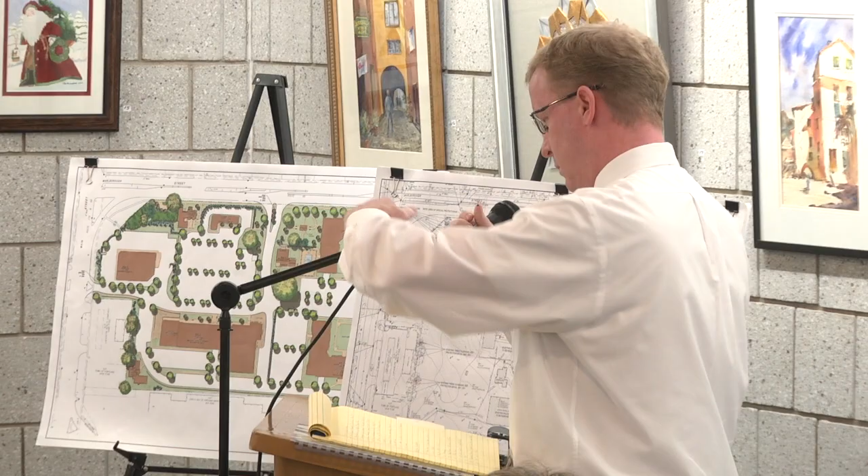The site is located with frontage on Marlborough Street, Main Street, and Perry Avenue. Perry Avenue is on the east side of the site development. It's currently home to the vacant Elmcrest Hospital and 3 historic structures: the Sage House, the Hart Jarvis, and the Brainerd House, with Sage located closer to Main Street. Hart Jarvis is centered in the portion of the property, and Brainerd is to the east of Hart Jarvis. In addition, the proposed development contains 14 single-family home properties located along Perry Avenue.

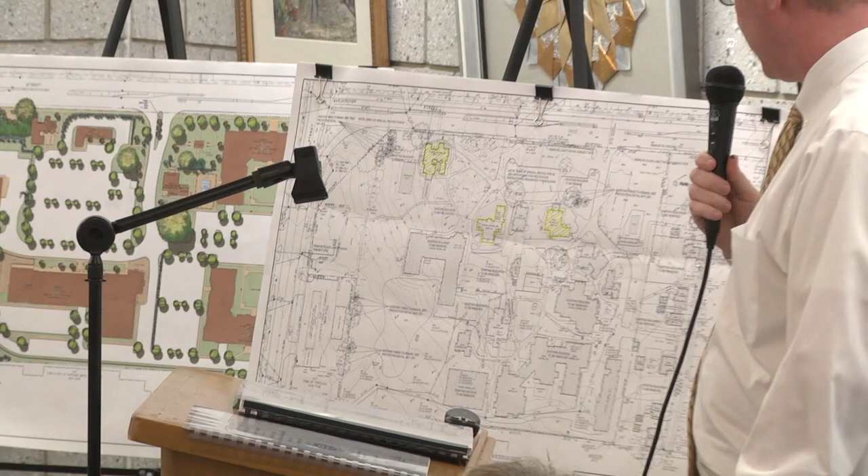The site consists of about 14.9 acres. It's located in the B2 and B3 business zones, as well as the Town Center Village District. The topography of the site is relatively flat to moderately sloping, sloping to the southeast and southwest from Main Street. There are no wetlands on the property. Site soils consist of hydrologic soil type B, which is a good, well-draining soil.

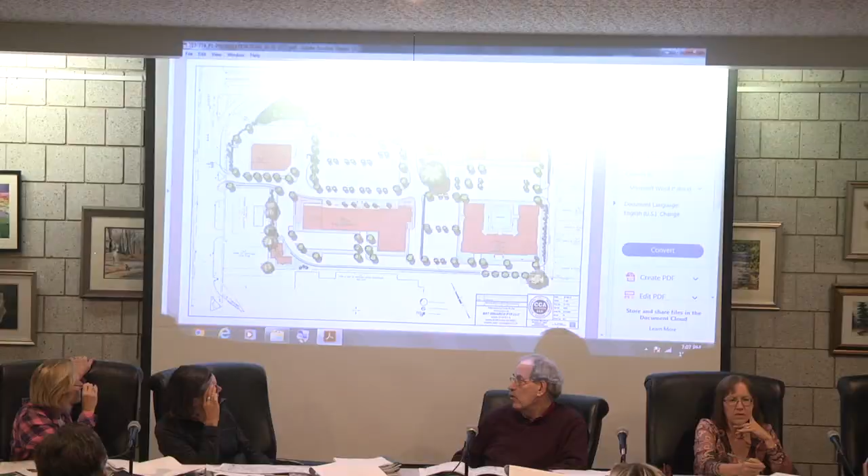This is Brainerd Place, a mixed-use development. There will be 5 new buildings proposed and 3 existing historic structures to be restored.

Building A, located on the south side of the property, is a proposed office retail building. Building B, located closest to Main Street, is a proposed pharmacy with a drive-through. Building C is the Sage House, proposed as a restaurant. Building D, to the east of Sage House, is a coffee shop. Building E, located at the corner of Perry and Marlborough, is a residential apartment building.

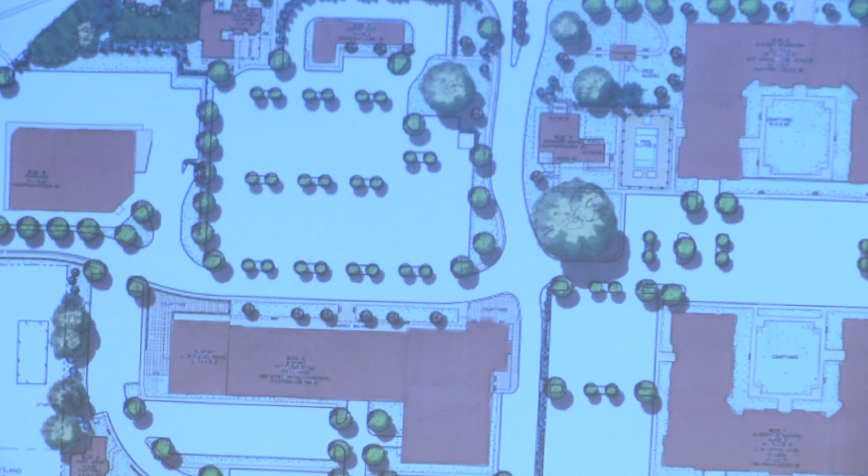Building E contains 101 apartments. Building F, located to the south of E, is the second residential apartment building, containing 139 apartments. Building G, located to the west of Building E, is the Brainerd House, which will be restored and serve as an amenity building for the residential apartment buildings. Between Brainerd House and Building E is a proposed pool for the use of those two residential apartment buildings. The last building, Building H, is the Hart Jarvis, which will be relocated to the southwest corner, right adjacent to the Town of Portland property, which has frontage on Main Street.

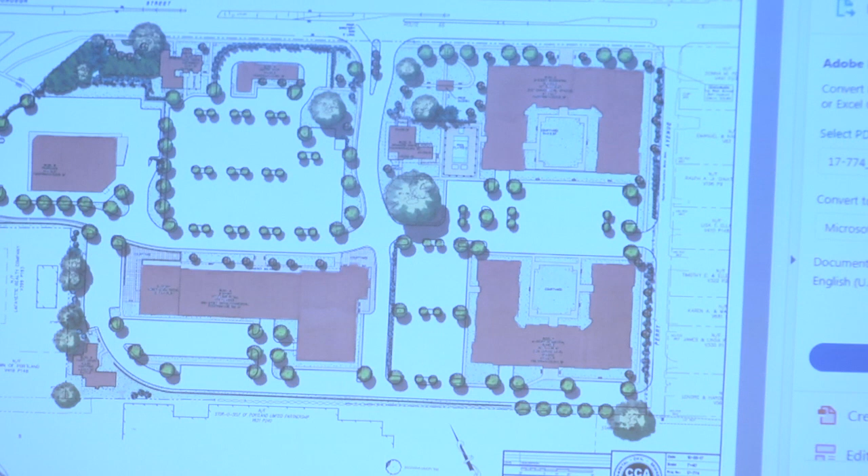Main access to the site would be from Marlborough, centered in the middle of the development, proposing a new traffic signal and road improvements along this section of Marlborough. We're proposing a right turn in and right turn out only onto Main Street. We also have 2 gated driveways on Perry Avenue, which are only for emergency access. There will be no regular use of those 2 driveways for users of the site or residents.

There are 804 proposed parking spaces, with 252 of them located on the bottom level in parking garages below Buildings E and F. 24.5% of the property is building coverage, 74.7% is impervious coverage — 80% is the max according to the regulations — and 25.3% would be green space.

As part of the MUD mixed-use development regulation, Section 9.17.5A allows for the request of waivers to certain regulations. They are located on our layout plan, but I'll go through them real quick.

The first is Section 7.33, access from Main Street to a drive-through service. That's the proposed drive-through pharmacy, where we have the pickup window in the rear of the building. We feel the proposed right-in right-out allows for good site circulation from a traffic standpoint, also access

for emergency vehicles and delivery trucks. The next section we're requesting a waiver to, or a slight reduction to, is 8.2, the parking calculation. We're requesting a 4% reduction below the required parking, related to the apartment buildings. We're basing the parking calcs on national standards for these types of buildings and unit mixes. The applicant has built this building in Brookfield, and we used the same unit count and parking calc, and it works out well for those unit mixes.

Does your plan show that 4% reduction in parking? Yes, it's listed in the table on the layout, in the design. In other words, what was it, 810 parking places you said? 804. Is that with the reduction or without? That's with the reduction. Thank you.

Next section is 8.2.6C, which is landscape strips between tiers of parking. The areas that would consider this are east of Building F and between Building A and B. We do have landscape islands. We felt a landscape strip would cause issues with the layout of traffic coming in and out, trying to align the drive-through and the other driveways into those parking areas. That same request was granted on the previously approved application several years ago.

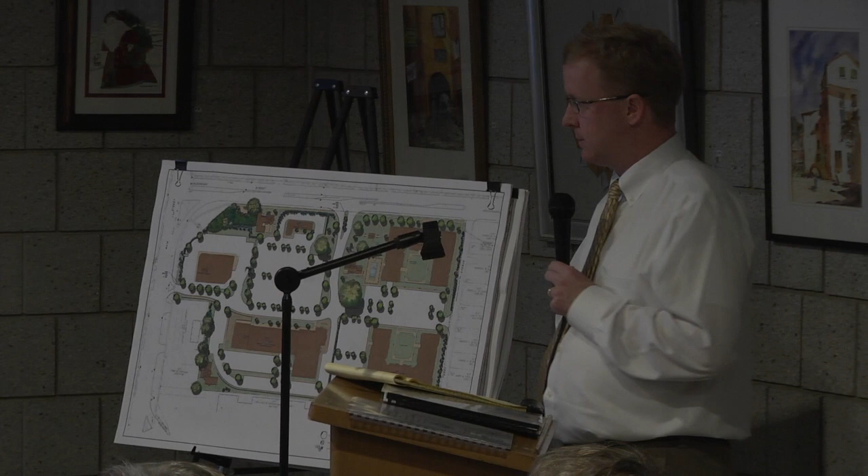Next waiver would be 8.2.6.E, the requirement for an 8-foot fire lane. That's basically the striped fire lane with no parking. We're proposing a 3-foot stripe with no parking signs. Based on our experience, that's been the norm for striped no-parking fire lanes.

Have you read the memos by the fire marshal and the fire chief? Yes, I have. And you believe that proposal, that waiver, is consistent with those? Yes, we have listed that waiver on the layout materials plan. Okay. And we would answer all those comments in writing as well.

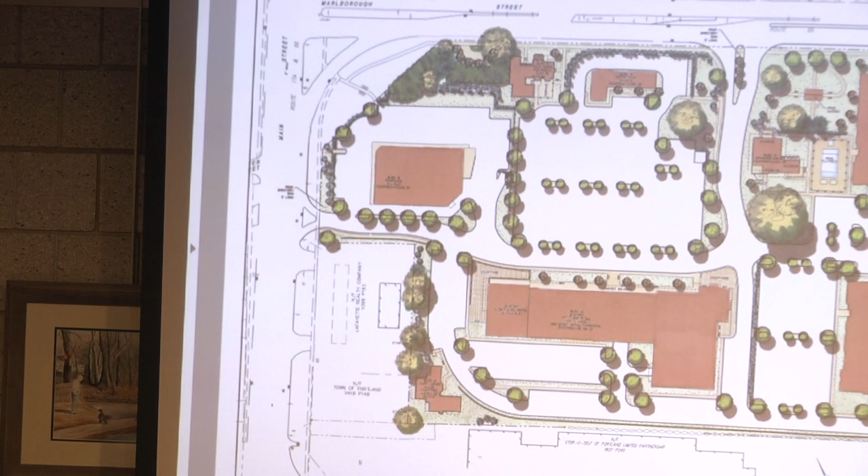Next one is section 8.1.2, a buffer along Main Street. That's required when you adjoin a residential zone or residential buildings. I brought this up at the pre-development workshop - across the street there actually are no single-family homes, so I don't think we need this waiver, but I haven't heard back from anybody in the town yet regarding whether it's applicable or not. In our opinion, that buffer is not required since across the street is not a residential zone or single-family homes.

Section 5.5 is building setbacks. Waiver to building C to the building setbacks, basically because it's pre-existing. It's there now, and based on the MUD setback regulations, it would not meet that. So that's one waiver. The other one is building H, the relocated Hart Jarvis, located in the southwest corner. We situated that to align with

the town of Portland property. The original plan had a smaller Hart Jarvis, but since we met last time, our architect and a nonprofit group were talking about incorporating the whole footprint of Hart Jarvis, so we had to revise the plan and fit that into that corner.

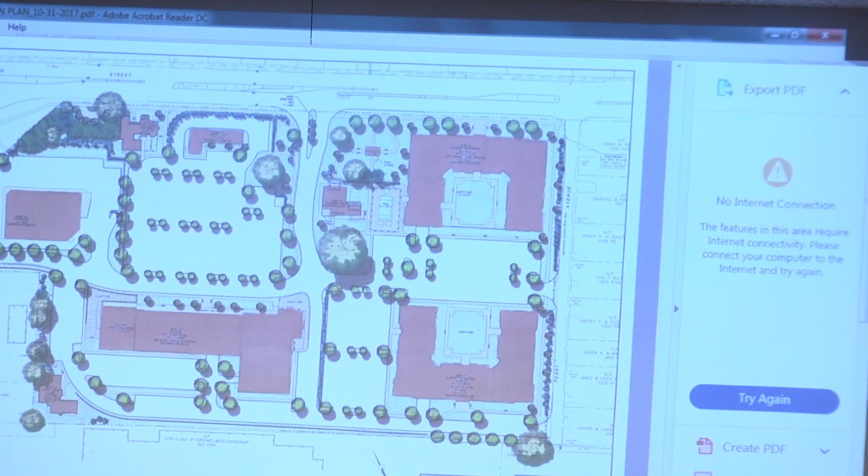The last waiver request is 9.17.5 regarding the ratio of residential units to percentage of commercial units. Phase 1, we're proposing 42% residential and 20% commercial. What that entails is the construction of building E, and then the construction of building B, D.

the restoration of Brainerd Place, the restoration of Sage, and the relocation of Hart Jarvis, and building B as well. So that would be the last request.

Our landscape architect is going to talk about the landscaping. There's going to be a sign waiver request as well, but it hasn't made the plan yet - that'll be on the next iteration. But I'll continue on with the site plans.

Next is the grading and drainage - pretty exciting stuff. Basically, we have a series of catch basin systems that collect surface runoff from the site and discharge it to what we call hydrodynamic separators. They're water quality units. From there - we can't see this, you've got to make sure things are up there - we'll have to just open that plan up.

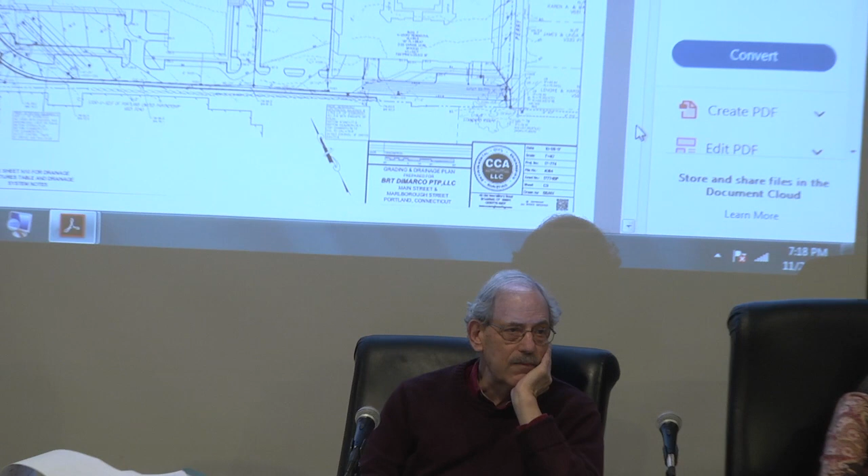So you're proposing to put in retaining walls rather than regrade? We're doing both, regrading and proposed retaining walls. Isn't the grade from front to back something like 36 feet? Yeah, on the south side we have a wall adjacent to the self-storage property that ranges in height from 1 foot to 10 feet at its highest.

From the gallery systems, we'll connect into drainage on Perry Avenue. Most of the site, the far majority, will connect into the existing easement located on the neighboring self-storage facility. There's an existing drainage pipe that we'll be upgrading in size, but we'll utilize that same route to convey the drainage.

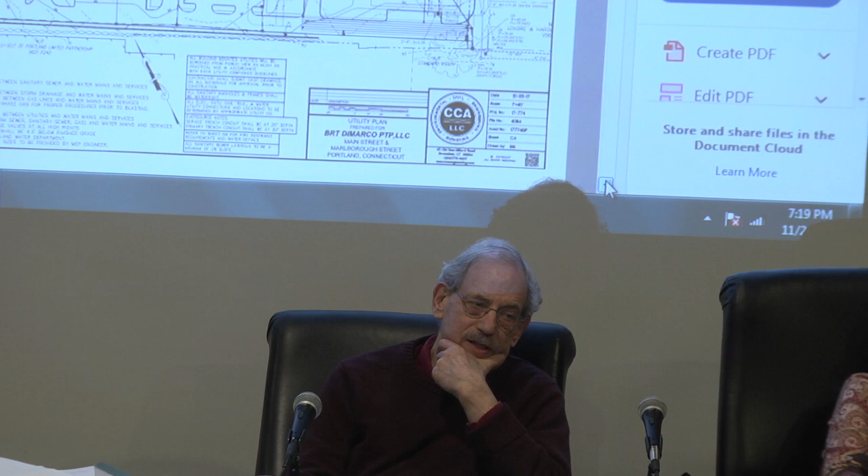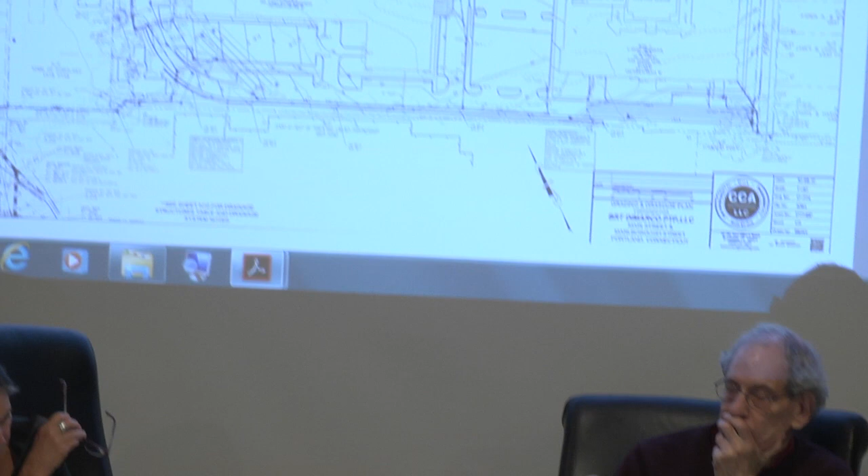So your preference is to create more drainage rather than reduce the amount of impervious surface? Well, we're below the impervious coverage. No, I understand what the regulations are, I'm asking from an architectural point of view. Right now it's proposed as bituminous concrete, paving, and sidewalks. Obviously this drainage system will have to get reviewed by the DOT as part of an OSTA permit application.

Moving on to sewer and water. If you want to switch that, Nick.

We're proposing to extend the sewer through that easement located on the self-storage property. There's an existing sewer line there, we'll pick up that sewer line and route it through the proposed development. All the buildings will discharge into that sewer main, except for E and F, which we're proposing to have each with its own sewer laterals out to Perry Avenue.

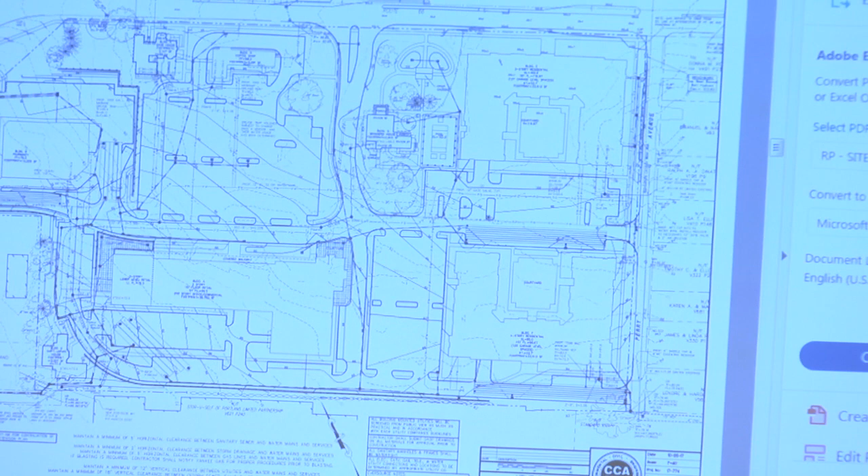From a water standpoint, we are going to extend the water main from the lower Main Street area, as was proposed by the last applicant for the previous development, and run it up Main Street. We'll propose to enter our site just south of the pharmacy building. From there, we'll route it through the site, serving each building, and loop it into the Perry Avenue main.

In addition, we're proposing to bring natural gas to the site from the east side near Pickering Street and over to Perry, then enter into the site from there.

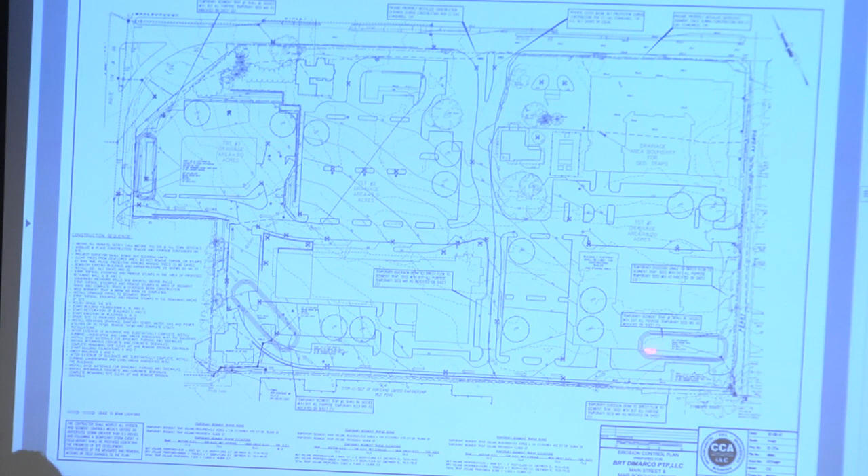Could you go to the erosion sheet, Nick? Okay, erosion controls consist of geotextile sediment fence, construction entrances, catch basin silt sacks, and the meat of the erosion control plan would be the 3 temporary sediment traps, which collect construction runoff and let it filter out before it discharges into the nearby drainage systems. In order to get construction runoff to these sediment traps, there are some temporary diversion swales and berms to divert the water to these low-lying areas.

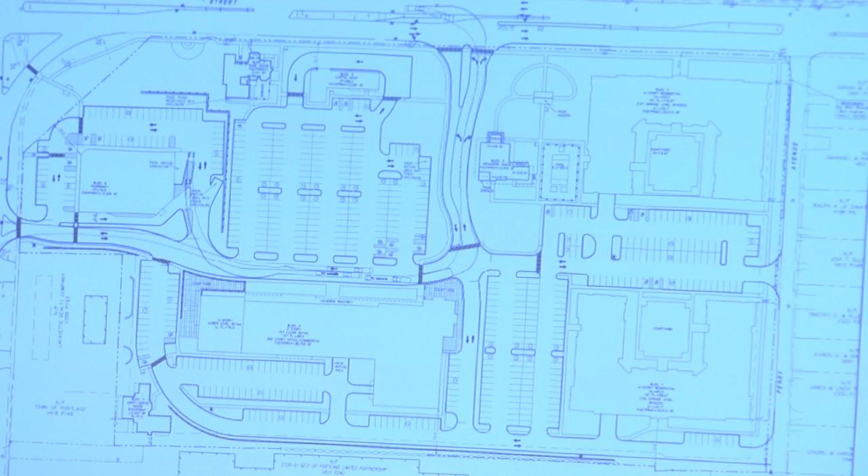We have included in the package a photometric lighting plan, it's probably the last one, Nick. It consists of all the foot candles. In the development report we have a manufacturer's cut sheet of an LED light pole. We're proposing the light source to be 27 feet above finished grade. So I encourage the commission to take a look at that fixture and welcome any comments you may have.

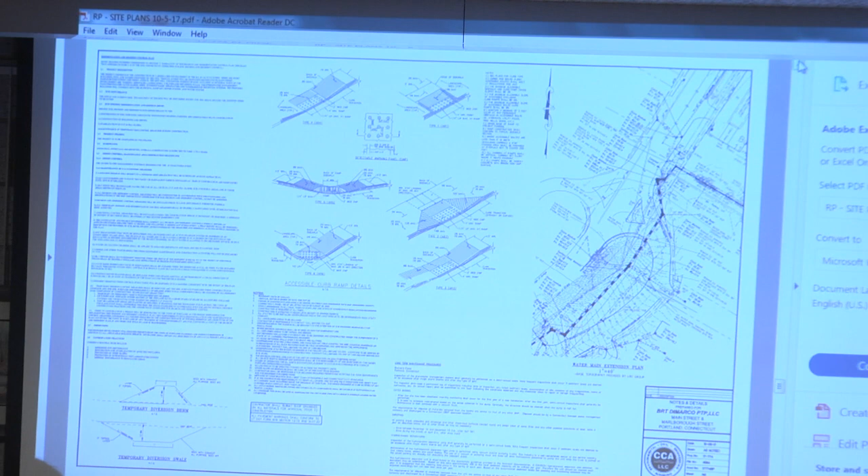I'd like to jump back to the layout plan, or the presentation plan. I forgot to mention we have a lot of sidewalks that provide good connectability between all the buildings and the street. In addition, we have several benches and bike racks throughout the site. And the main green space is just north of the Brainerd house, which shows a proposed gazebo. When I hand it off to the landscape architect, he'll talk about some of the landscaping we had proposed there, but we feel that's a nice feature for the development. So with that, I'll hand it off to the landscape architect.

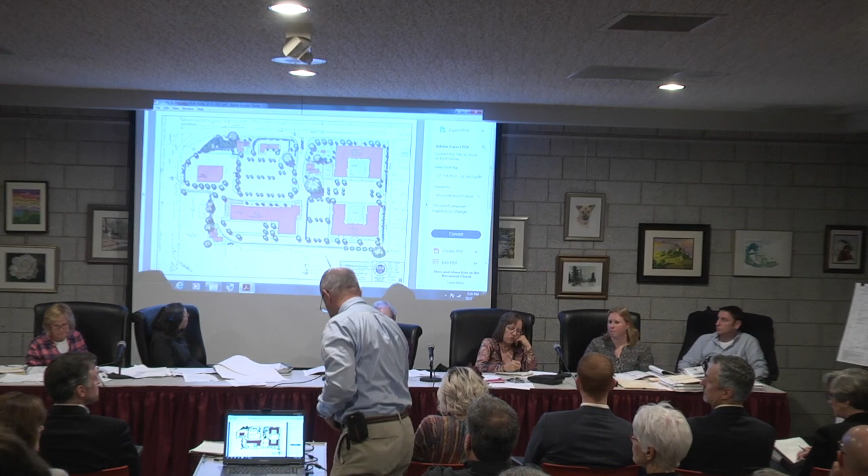You want to do it after? No, you can't, you get a chance to do that once we turn the hearing over to you guys.

Good evening, for the record, Nick Ushjak, Registered Landscape Architect, CCA Engineering in Brookfield. Before you is a colored version of our site plan that you have seen.

We are preserving a great number of existing trees on the site, starting with the northwest corner, in particular where Marlborough and Main Street intersect, there's a large stand of existing trees. Keeping this stand serves as a backdrop for a new sitting area that we're locating off of Marlborough Street. In addition to that, there's a large existing sassafras at the corner of the Sage House.

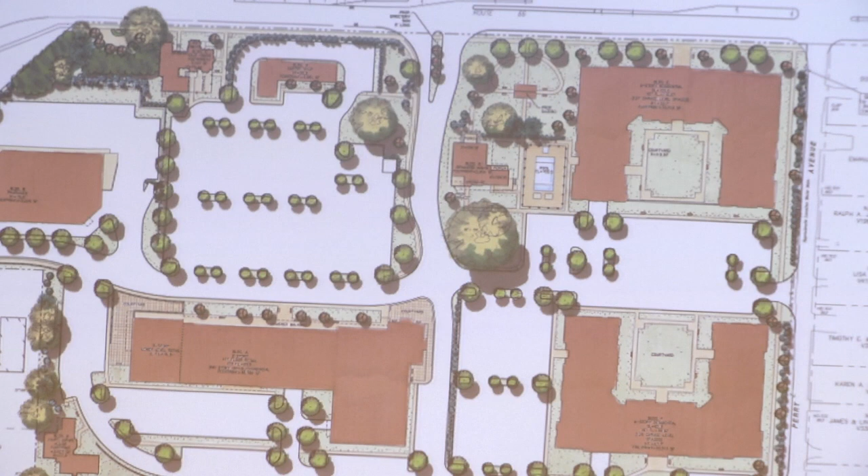We are proposing a large number of deciduous trees. These are shade trees, as opposed to evergreen trees, and they populate the entire site. They're basically in parking lot islands and the rest of the green spaces, and they function to provide shade throughout the site and define various use areas.

What you see on the plan here, the size of those trees depicted is approximately what the spread would look like at planting or a few years later. Ultimately, these trees will spread and knit together.

We have planted varied size plants depending on the use areas. For instance, lining the access roads and linear islands, we'll be using medium spread trees. They'll probably get to be about 25 to 30 feet in spread.

At the end islands, we'll use medium-sized trees where space permits, and in the islands with tighter conditions, we'll specify columnar trees. So in all cases, the species chosen will fit the area. For instance, in the larger lawn areas, we'll be specifying trees that might get to be ultimately 50, 60, 75 feet in spread.

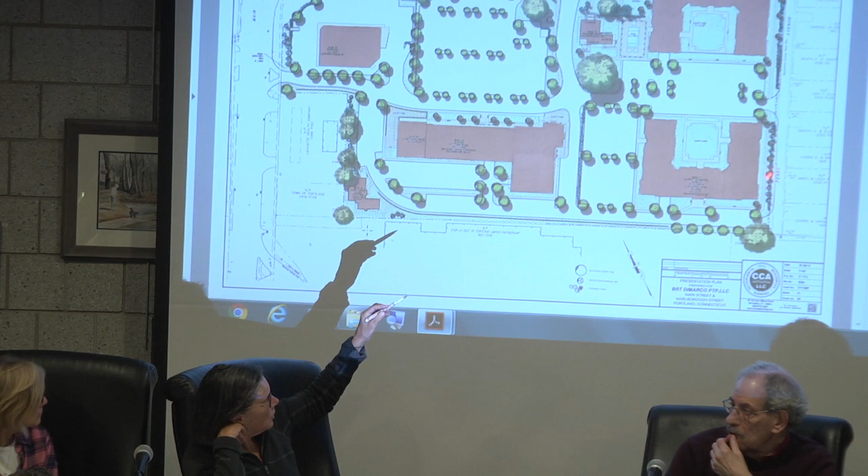Well, I have a question about the row of evergreens along Perry Avenue. Are these going to be planted in grass, or will there be beds, and will there be other things in there besides just the trees?

There is a slope there, so they will be planted in the grass on a slope, and they are varied heights. Rather than have one long column of trees all at 6 feet, we'll have some at 6 feet, some greater than that, and different species to mix it up, in addition to the flowering trees we're locating in there.

I'm sure we'll have a bunch of questions for you all at once, but we'd like to run through the presentation first and then ask for questions. Yes, thank you.

I guess I'll just talk. All right, good evening. For the record, my name is Joe Balskis. I am a Director of Transportation Systems for VHB. I'm a 27-year resident of Portland, and I've been involved with this commission itself 20 years ago as an alternate member, so I know the side of the table you're sitting on. I've been doing traffic studies for a number of years, and I'm here with my associate Charlie Baker, who's going to give the details of the traffic presentation.

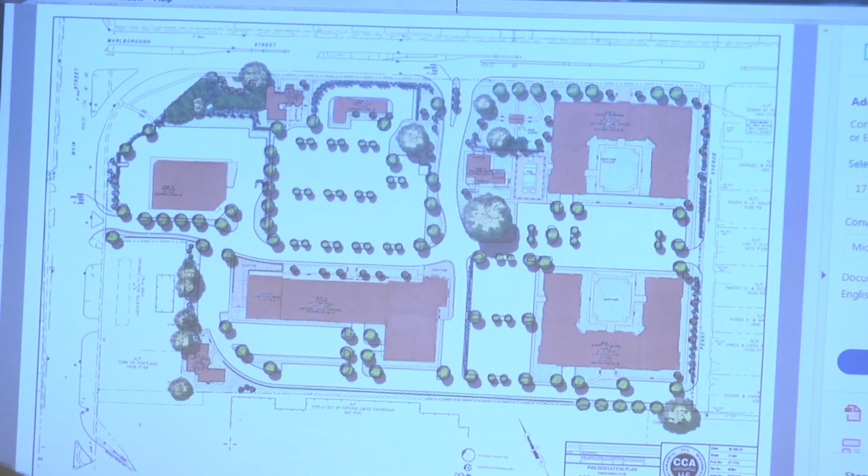So the intersection we really focused on in our traffic study is the intersection of Main Street and Marlborough Street. The analysis results indicate that intersection is currently operating at level of service C, which is typically considered to be

acceptable. But again, we are very familiar with this area, and we do know that there are issues on the westbound Marlborough Street approach. There are relatively long delays and vehicle queuing on that approach, particularly during the morning peak hour, as motorists try to get to Middletown and go over the bridge. Vehicle queues do back up on that approach.

So we tried to look at some improvements we could make to mitigate traffic conditions at that intersection. I'll just pull up a board for you.

Are you going to talk about pedestrian traffic as well? Yes, sir. Okay.

Yes, it's the other PDF that's open.

Okay, so if you direct your attention to the screen, north is to the right on this screen. This is Main Street, this is Marlborough Street, and this corner right here is our project site.

One of the key issues we were trying to fix at this intersection, as I mentioned, there are long delays and vehicle queuing on Marlborough Street, and there's also an issue that currently there are only 2 through lanes in each direction on Main Street, with no left turn lanes. So sometimes when a vehicle is waiting to turn left from Main Street onto Marlborough Street, it obstructs through traffic along Main Street.

So the fix we're proposing is to widen Main Street on the east side of the road, where you can see hatched in red here, and then restriping the road to provide a southbound left turn lane onto Marlborough Street, so that when vehicles are turning left, they're not blocking through traffic anymore. One benefit of doing this is it increases the capacity of the intersection, so we can afford to retime it and take away some green time from Main Street and add it to Marlborough Street, effectively increasing capacity and reducing delays at the intersection as a whole.

Isn't that going to increase your costs a lot, since the right-of-way on the east side is not owned by the state? I believe we do have sufficient right-of-way to do this widening. You sure? Okay. Yes, it is more costly than the other alternative we considered.

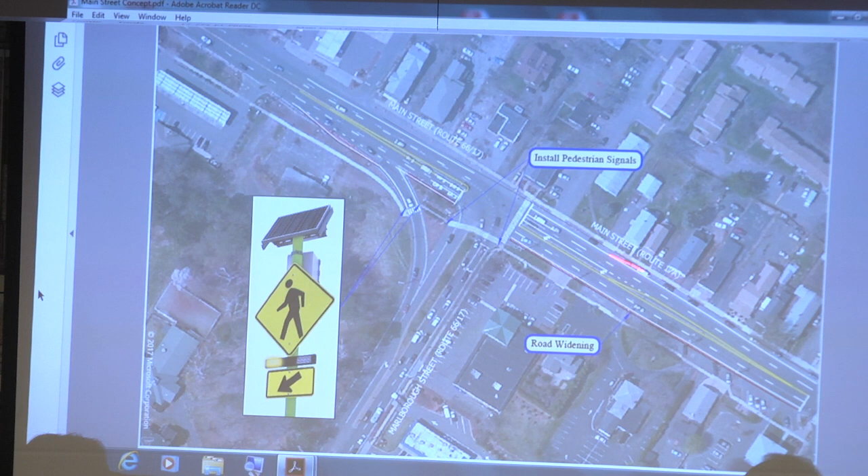We did consider widening on the west side of the road instead. However, we know that the town has recently done streetscape improvements there, and based on discussion with town staff, we know that's not desirable. We don't want to rip those up, so we're doing the widening on the east side instead.

The other improvements, as mentioned, we're looking at how to improve pedestrian accommodations in the area, which we know is a concern in the town. One improvement we're proposing is to install pedestrian signals for this Marlborough Street crossing. Currently there are pedestrian signals and push buttons for crossing Main Street, but nothing for Marlborough Street, so we can add pedestrian signals and push buttons to allow a safer crossing.

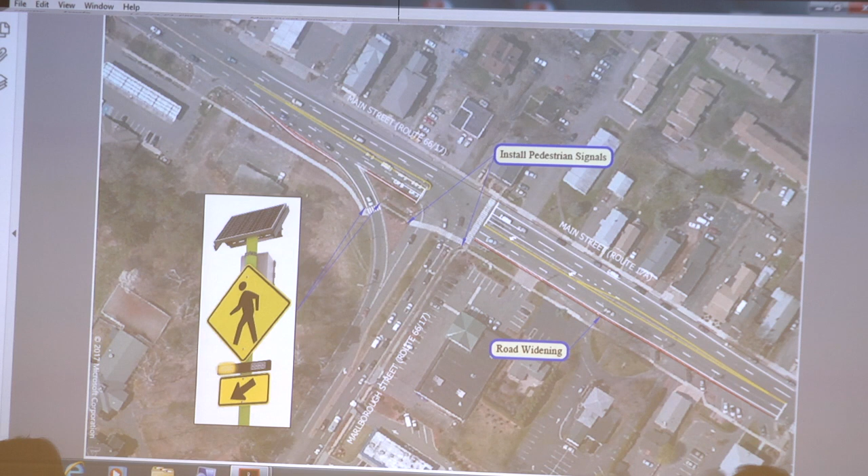The other improvement we're looking at is for this channelized right turn lane from Main Street onto Marlborough Street. It has a very large radius that encourages high speeds around that corner. We've heard from talking to residents, and from driving through the intersection ourselves, that vehicles generally have trouble—there's poor visibility of pedestrians, and when motorists do see pedestrians, commonly they don't yield.

So we're recommending the installation of RRFBs, which are pictured here. That stands for rectangular rapid flashing beacon—essentially flashing beacons attached underneath the pedestrian warning sign. There would be one on both sides of the road, and on the pole a push button that can be actuated by pedestrians. Whenever a pedestrian pushes that button, those lights flash.

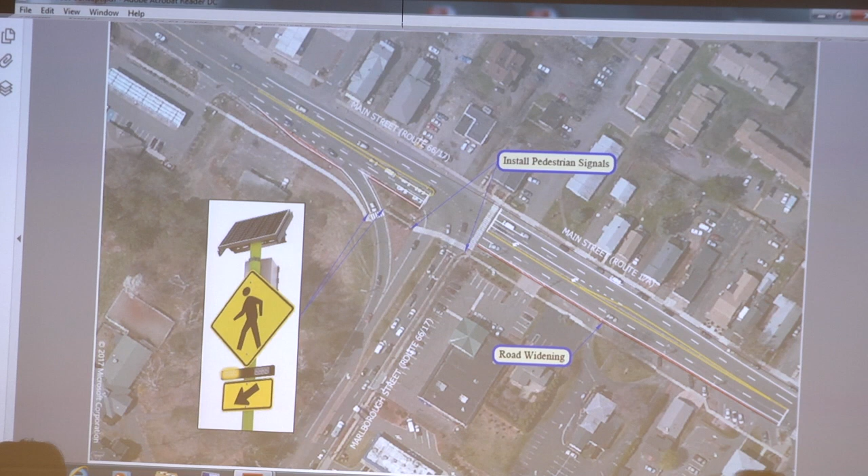There's been a lot of research suggesting that flashing beacons increase visibility of pedestrians and increase driver yielding behavior. So hopefully some of the issues we have right now, with a pedestrian waiting to cross and cars continuing to fly past them, this would help with, because it'd be much more visible, and motorists seeing the flashing beacons would stop and allow pedestrians to cross.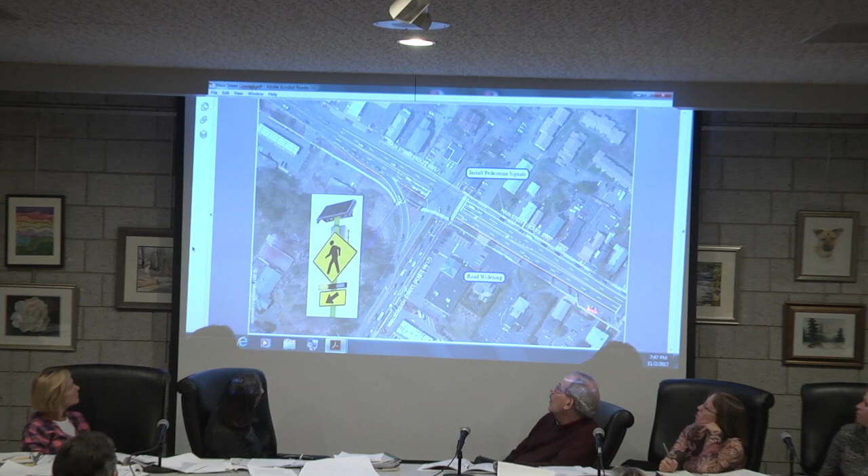You're saying that making the road wider—you're talking about making the road wider up there? Is that what you're saying? Yeah, it's hard to tell in this image. The red hatched areas along this side would be the limits of widening. I believe it's about a 4-foot widening that we would do, then restriping the pavement so we can have 2 lanes in each direction, plus room for this left turn lane here.

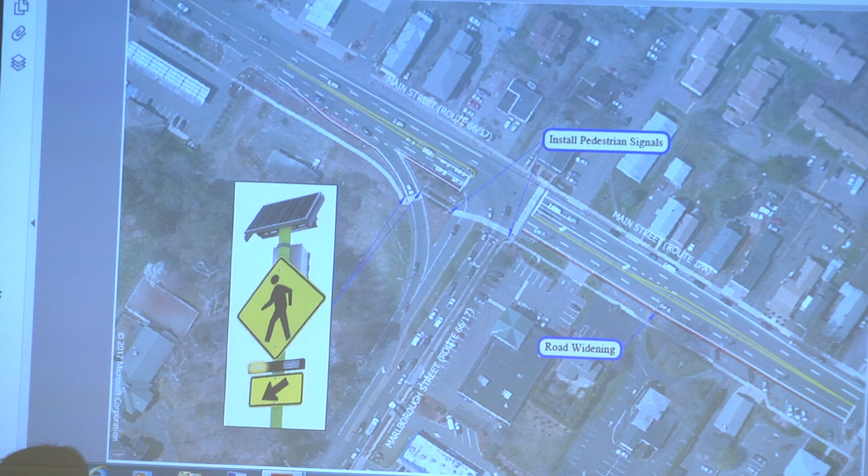But I was talking about the piece that's up there. Oh yes, yes—we think we'd extend the widening a little bit further back. This piece right here is just to provide a little bit of a deceleration lane before you get into there. Right now it's essentially going from 2 through lanes and then it just branches off without any kind of deceleration lane. With just a little bit of widening, it allows vehicles to get off to the side, out of the through lane, before going into the channelized turn lane.

So we think that these improvements at this intersection will mitigate the impacts of the proposed project. With these improvements, the intersection is expected to operate at the same overall level of service under future conditions, with the additional traffic from the development, as it does today. And again, with the pedestrian improvements, we feel this is a much safer condition than we have today as well.

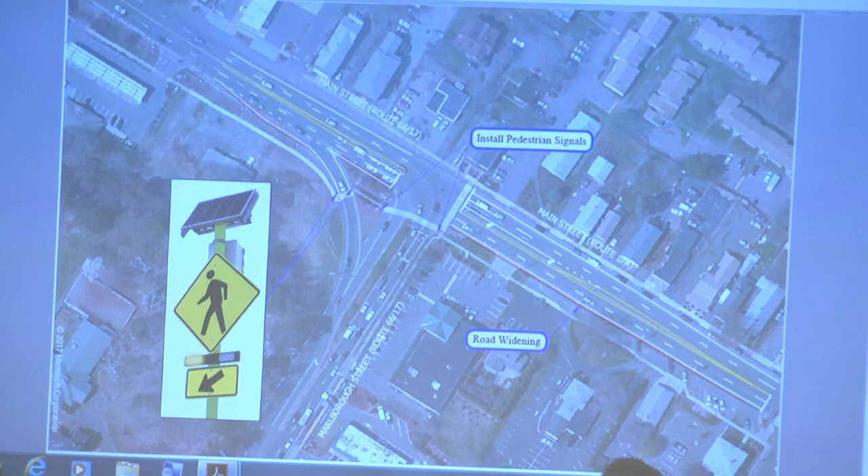The other improvements we're recommending in the area: as Steve mentioned, we are proposing a traffic signal at the main site driveway. Because that signal fits within a system of traffic signals along Marlborough Street, we're recommending minor signal timing changes at each intersection along the corridor to improve progression and ensure the signals operate properly in coordination. In conclusion, we feel these recommended improvements mitigate the impacts of the proposed project, that it will have minimal impacts, and that the driveways can adequately serve the development traffic.

What do you think is the reason for changing the traffic frequency from the old project to this one? It's just a different development program. There's less intensive traffic uses on the site. You're saying it's because it's more residential and less commercial? It's smaller. The uses on the site are less intensive traffic uses. Residential doesn't typically generate as much traffic as some of the retail uses they had previously.

Okay, now I've never seen one of these flashing beacons. Have there been any studies done as to their effectiveness? Yes, there is a lot of research. They're relatively new, particularly in the state of Connecticut. I am aware of a few installations here. Because they were experimental in nature several years ago, every time one was installed there was always a before and after study measuring driver yielding behavior. Essentially, pedestrians would try to cross the road before it was installed, and you'd measure how many cars stop and let them cross versus just blowing right past them. Then they'd do the same study after installation, and they've proven to be very effective at increasing drivers yielding.

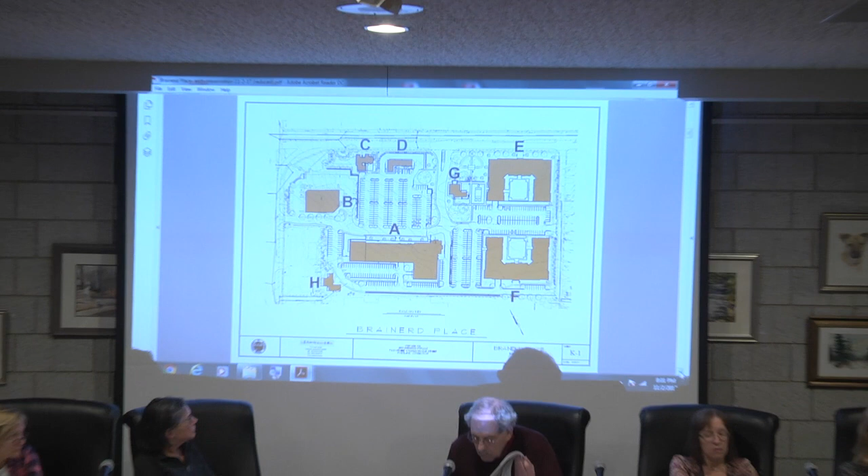Before I get into each of the individual buildings, I'd like to ask Alan to come up and talk about the 3 historical buildings that are being restored.

I think you do have my slides in there, don't you? Yep, I think they are loaded. Thank you, Steve.

Good evening. Thanks, Paul. My name is Alan Munkitrick. I'm the principal partner with Munkitrick Associates. We're an architectural, interior design, and space planning firm. We've been here in Portland for almost 30 years.

Munkitrick Associates' assigned role in this Brainerd Place development, as requested by Dan, is specifically to provide architectural services for the historic 1855 Brainerd House, Building G, and to serve as consultant for the historic 1884 Sage House, Building C. In another capacity, we're also assisting with the coordination of the relocation and restoration of the historic 1830 Hart Jarvis House, Building H. So those three are what we're focusing on.

Well, we've got the old-fashioned. Oh, here we go. I think he's got it. Okay. All right. Thank you. That's perfect.

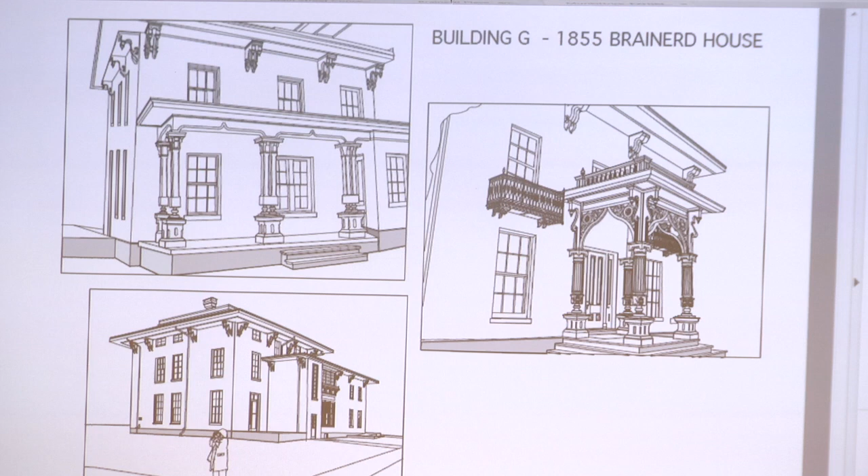Plans for these three rehabilitation projects are at various stages right now. The historic 1855 Brainerd House, Building G, is set slightly back from Marlborough Street. You probably all have glimpsed it. In the plan, we're very pleased that it's going to retain the landscaping in the front and the back. I think that's really important. As you've heard, it will serve as the main amenity center for the use and enjoyment of the tenants in the residential blocks to the east. The schematic plans have been developed so as to require minimal changes to the exterior of the Brainerd house.

Next slide, please. When you say amenities, what are you talking about? I'll tell you right now. Oh, okay, I have to write it down. Good question.

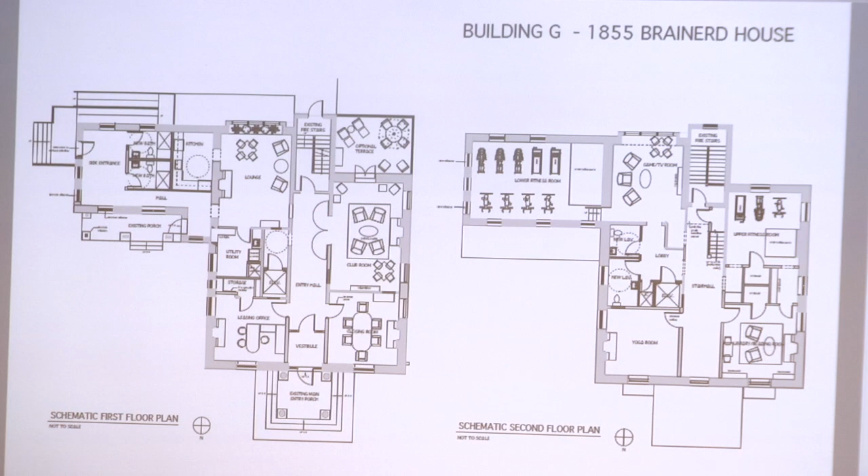5,740 square feet of interior space will be completely renovated in the Brainerd house. Mechanical systems upgraded in such a way as to maintain as much of the historic fabric of the interiors as possible. The renovation will include, on the first floor, a leasing office, conference room, tenants club room, and lounge spaces. On the second floor will be located a fitness center, a yoga room, a lounge, and a library reading room. New bathrooms, a kitchen, and a two-stop elevator are also planned.

Next slide, please. Building C, the 1884 Sage House, which is close to Marlborough Street. This is the historic building that you always see. We've developed a feasibility study to demonstrate that the first floor, about 3,100 square feet, can be adapted for reuse as a restaurant facility, seating up to about 94. If you could go to the next slide, please, Steve.

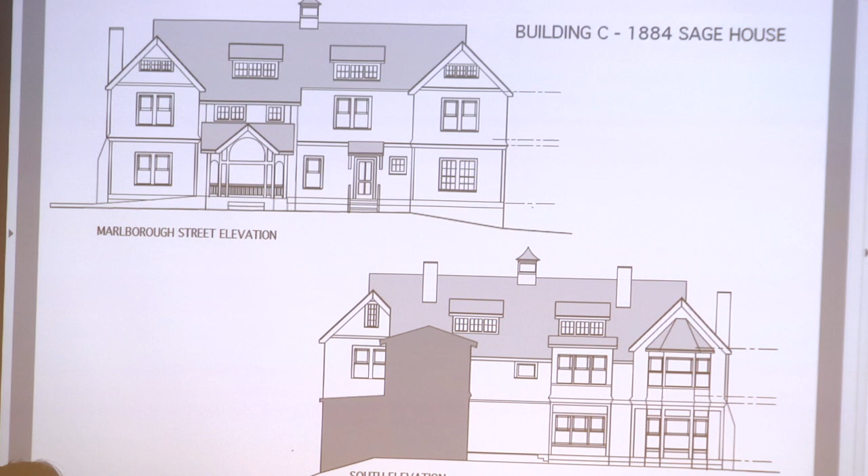Thank you. This is a very schematic feasibility plan, but I include it because I want to point out that we're going to remove two modern and incompatible additions on the rear of the house, on the south side, which you probably have never seen unless you've been on site. We're doing that for a couple of reasons. The main one is to create a nice open garden terrace for outdoor dining in the back, about 600 square feet, not included in that 94 estimate of interior seating. All of this can be accomplished with minimal modifications to the building's historic elevation. So again, like the Brainerd house, we're really pleased that we can fit an interior program without making major changes to the historic elevations.

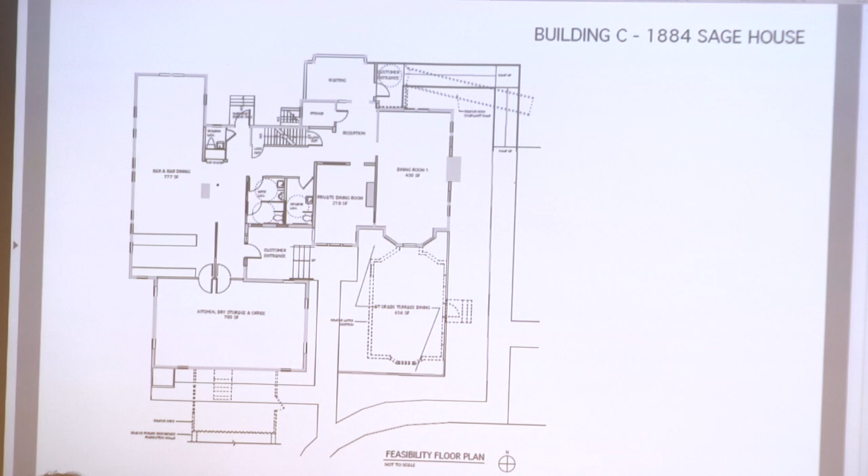So now this new enlarged footprint, which Dan and the site engineers have accommodated, which is great, is going to facilitate about 5,800 square feet on two levels. It's really quite a large structure. As you probably know, citizens from a number of local nonprofit groups are now working on the details of this building's program. As that comes into focus, we will assist with the internal layouts that, like the Brainerd and Sage houses, will preserve the Hart Jarvis house's historic integrity.

It's been a pleasure to work productively with Paul of Cole Harris Associates on some of the details of the new commercial construction that Paul will next present. Our mutual goal is to see that wherever possible, the architectural design for the new construction will relate to these historic structures in form, materials, and their look and feel. We will continue to assist Paul and Dan's design team in any way we can to capitalize on the historic assets of the site. Successful development of the Elmcrest campus will inspire new and positive development of Portland's downtown village. Thanks very much.

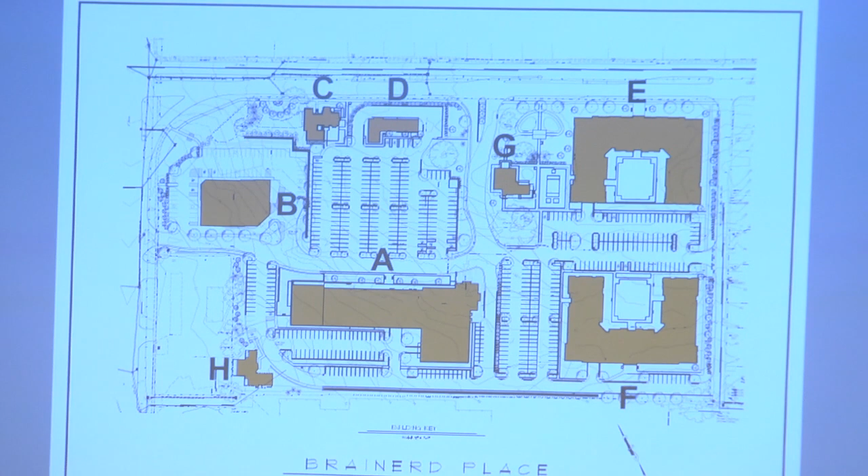So let me take you through some of the buildings and the thinking behind what we have here, starting with Building D, the first building you see as you come down onto the campus. When we first talked about this concept and looked at the original study you had commissioned, concept A, this most closely resembles that. It had a few more buildings in this area, but we feel these two buildings are critical because even though they're part of a more commercial fabric, this building up front we wanted to relate as much as we could to the more residential scale. There was an old carriage house behind Brainerd that was just not feasible to move or relocate, so instead of copying it—since the Italianate style of that building and the more shingly Victorian style differ—we wanted something that would buffer the two.

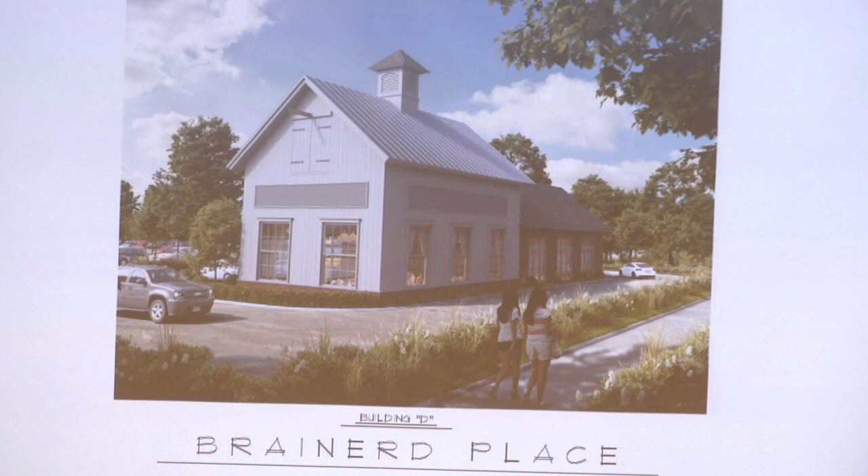So if you could go to the next slide, please. The concept of this building is something that could have been a carriage house, a stable, or a utility building. This is the sidewalk that runs right along Marlborough. The plans right now are for a 3,200, almost 3,300 square foot footprint. It's a single-story structure, and probably two tenants can fit in it, a small restaurant or a coffee shop, which is what I think we're hoping to get as a tenant. It's got a mixed use of materials: vertical siding, a metal roof, and also an asphalt roof with a brownstone portion of thin stone veneer at the base of the building and on the other wing.

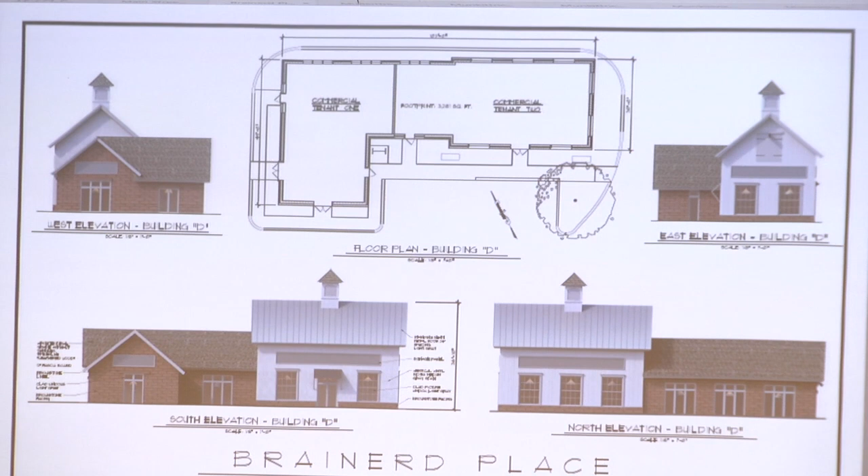If we go to the second plan, please—this illustrates the floor plan, how it might be broken up. The main entrances to this building are off the parking lot, so you come in from the south, even though Marlborough runs along the side here. It's broken up into two tenant spaces. The larger form, approximately 35 feet tall, is the larger cladded building, vinyl cladded, which looks like barn siding, and then the other piece is the brownstone structure, which is slightly lower and subordinate, with a mix of materials. The shingles on the roof will be an architectural grade timberline, probably a color similar to weathered cedar, even though it's asphalt—it's a very popular color, I'm sure you've all seen it. That's pretty much the concept for the exterior envelope of that building.

The second building—I'm sorry, I wanted to show this because this was the actual drawing you got in your submission last week, but our renderer colorized them, so we thought you'd like those better.

The next building as you come down—can we go back a couple, Dan, to the site plan with the letters on them? Thank you. The next building is Building A, a very large mixed-use structure with a footprint of approximately 38,750 square feet. The first main level, at the parking level, could be for a single tenant or multiple tenants, we don't know, but we see this as retail. The second story would be offices, again either multiple tenants or a single tenant, with the entrance to the office space off the back parking lot. All the retail space runs along here—there's a sidewalk, a planter lined with trees, and across the entire run of the building is a covered colonnade, so for weather you can come out, and if you're parked over here you can walk under the whole building and stay out of the weather.

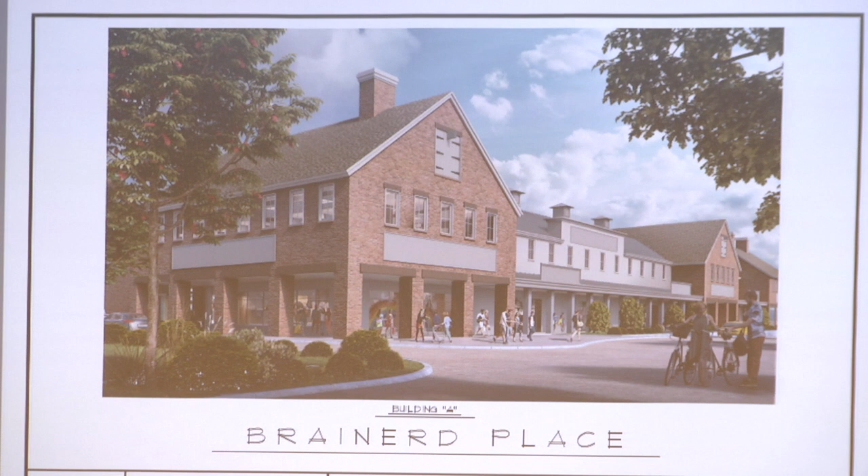Very little embellishment, very simple coursing of the fenestrations of the windows. We've got them up on columns, trying to create a diverse building mass, breaking it up since the building is about 380 feet long. We wanted to find a way to break this mass up, so it seemed more like individual buildings, gang buildings, or possibly a mill building that evolved over 50 years or so. So brick will be the primary material, and then we'll come back to that vertical siding, which was also very common in this part of Connecticut.

And the colonnade goes to more of a wood post look, even though it will be vinyl clad for maintenance. Right now, the signage on the building that you're seeing here is broken up for multi-tenant, whereas if we have a single tenant, the signage will probably be minimized.

You said the main construction material is brick? The main building facade of these structures is a brick veneer, yes. As opposed to brownstone? We don't have brownstone on this building, but we do have accents of brownstone. So all of these big, heavy lintels that you see over all the colonnades and over the tops of the windows are brownstone veneer, even up to the old hatch where the storage bay might have been on that building.

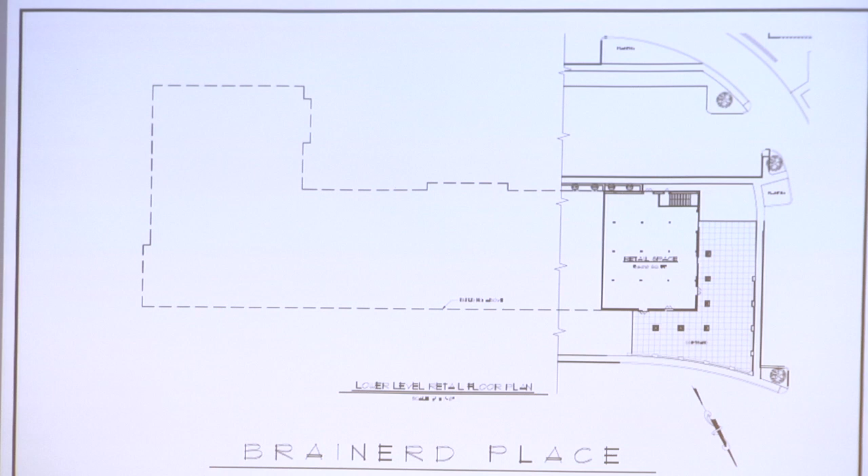This is the basic footprint of the retail space, which is the main level. This is your colonnade, the covered colonnade that runs across the front, with 24-foot or so columns. We're hashing out the back half of this building. If this is retail or grocery stores or whatever, they're going to need back office space or back area storage space. There needs to be entrances and loading docks, and right now this is very schematic in nature. Whoever the tenant is will dictate what these things actually become.

This is the upper level, which would be the office space. There's a single elevator that comes up and a stairwell, plus 2 other means of egress on this floor. This can be broken up into multiple tenants or a single tenant as wished.

These are the black and whites that you guys had gotten in your package earlier.

Hold on one second, let me just check something. I want to see where we're at. Next slide, please.

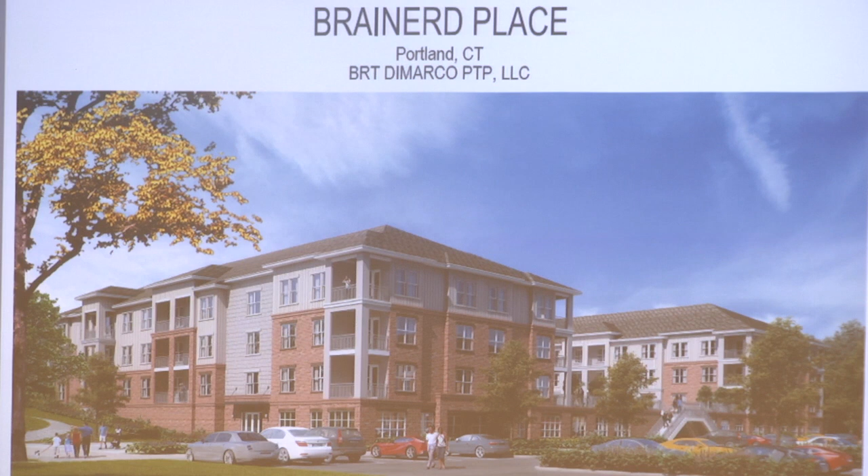Building E, which is this building right here, is the first residential building that faces on the corner of Perry and Marlborough Street. What you're looking at in this view is the back of that building from the campus of the site.

So Dan, I don't know if you can skip back real quick. I just want to orient everybody of the views we're going to be looking at. Go back to the site plan, which would be the first, the lettered colored one. One more up? Yep, one more down.

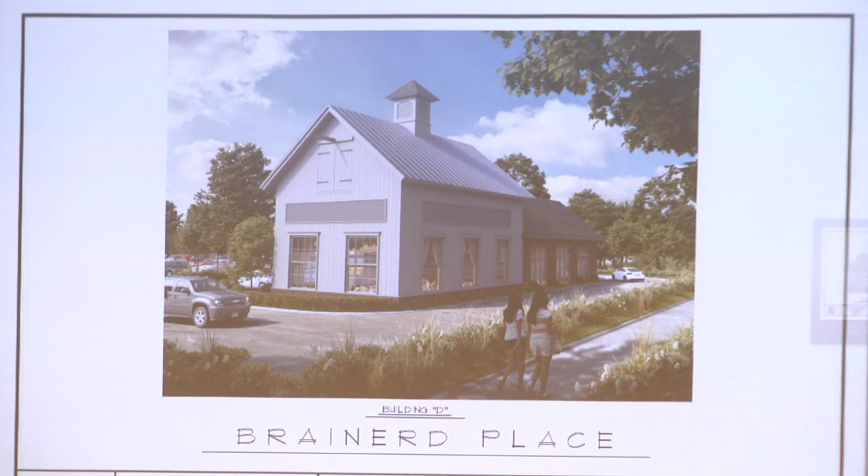There you go. We're looking at 2 views of this building, and there's some massaging that still has to be done here because this was not loaded, so this is a representation of what you're looking at today. We have a central campus view of this building from about this perspective here. However, there's this magnificent 60-inch oak tree and another large ginkgo which would probably block this view. So if this tree wasn't here, you're looking at this view right here.

The other view we're going to look at is from across the street here along Marlborough. We've stripped away some of the trees that are going to hide this facade to enable you to see this building a little better.

So if you can now go to that last one here. Oh, back one. Back one, please.

So this is on the campus. What you see is this building, and the grade is a little bit higher on this side than what's depicted in this drawing. But what you're looking at is three stories of apartments situated on top of a parking garage. So from the front on Marlborough Street, you'll only see 3 stories. But on the back in the campus, where these U-shaped buildings face each other, the parking garages enter under this level. This building is important because while you can enter it from Marlborough Street, and it does have an entrance to it, the plaza court entry and the parking pedestrian access is all in the back here. So there's kind of a grand stair that goes up to this beautiful open courtyard that actually covers the top of the parking garage.

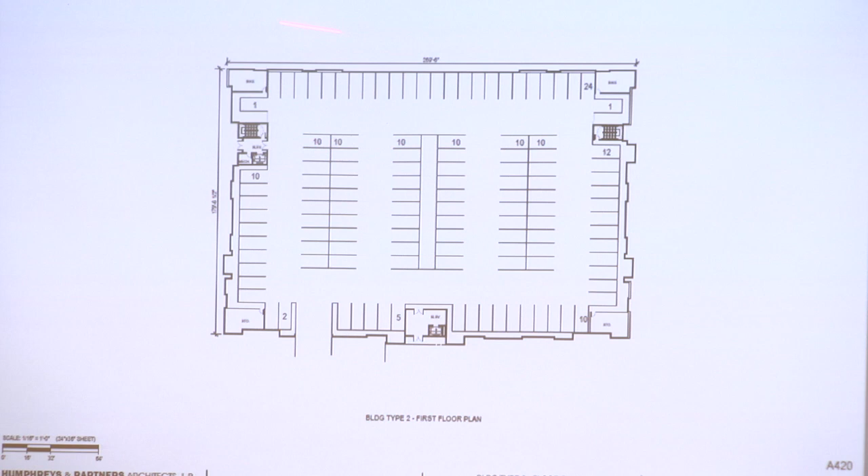This is the parking garage, which looks very similar to the first one I showed you. The difference here is the main court between the buildings is up here, so you have to drive to the back of this. This is right along the south property line, a side of the building very difficult to see, and the entry into the parking is down in here.

This is the main level, our courtyard, which is actually at street level. So that parking area out in front, and the building on Marlborough Street — you walk straight across this onto the plaza and into this room, into this entry where the elevator banks are. So this level is actually apartments, whereas on the building above, it's the parking garage. It's important to point out that the roof elevation of the building starting on Marlborough Street doesn't change — it's the same height all the way through.

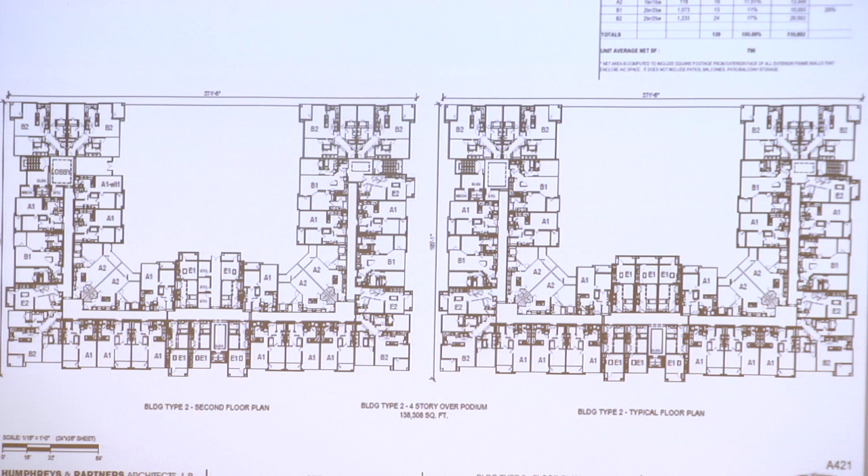It's the site that drops out from underneath it, which provides us an extra story of apartments on this back building. This is why this back building has 4 stories of apartments, 1 story of parking, and the building in the front on Marlborough has 1 story of parking and 3 stories of apartments. However, from the entry front points, they still...

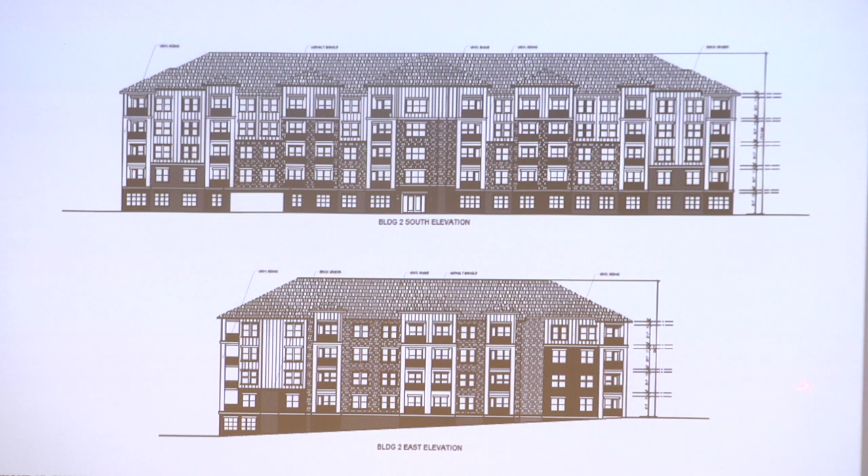Next slide, please. And this is the facade that no one will see. This is the southern facade. That's where you enter into the parking, with the 4 levels of apartments over it. And then it actually runs down the eastern Perry Street toward the back of the site. And again, you see the garage that comes out of the ground and the building facade there.

Next slide. Also part of your package, so you can have an idea of what these units are, and Dan can get into that next, what the mix is. But we have 6 different units. There are 4 here. There are 1 bedrooms and 2 bedrooms. There are corner units. Next slide.

And this is one of your 1 bedrooms there, and a 2 bedroom there. Yep, these 2 are 2 bedrooms.

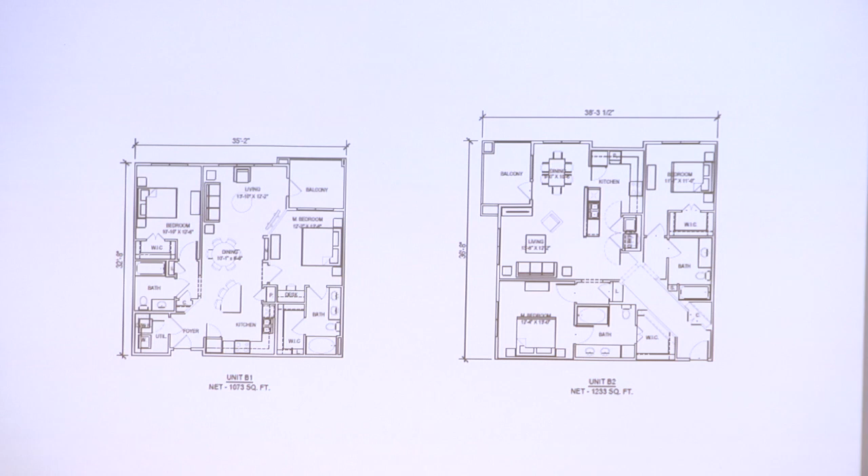And with that, I'd like to maybe turn it over to Dan to close, unless you have any questions for me.

Is this building E or building F? These are all the same. Both buildings have the same types of units in them, except one difference - it's just the difference of 3 stories versus 4. The only difference between the 2 buildings is that building F, which is at the back of the site, has an extra level of apartments.

And Dan, if you could go back to the rear elevation for a minute. Let's go back to the building first - if you can go back to the color rendering of the back corner, which would be the first rendering here, that one. So it's clear: the elevation of this roof, which starts as 3 stories on Marlborough Street, that elevation stays as it runs through the site. It's the building site itself that slopes away. So again, what we have here is three apartment floors and a parking level. What happens in the back is that parking level becomes an apartment level, and that's where you pick up your 4th story.

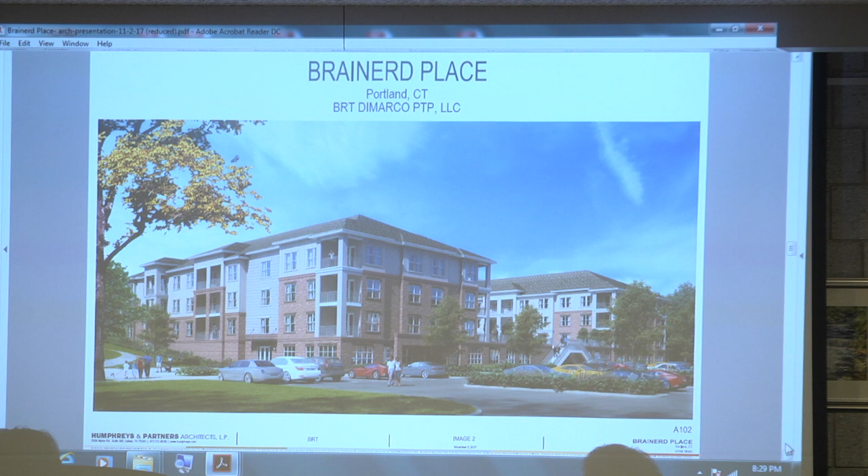So the reason I'm asking is because I'm looking at the unit tabulation, and it shows basically 70% 1 bedroom and 30% 2 bedrooms. Is that true of both buildings? Is that percentage true of both buildings?

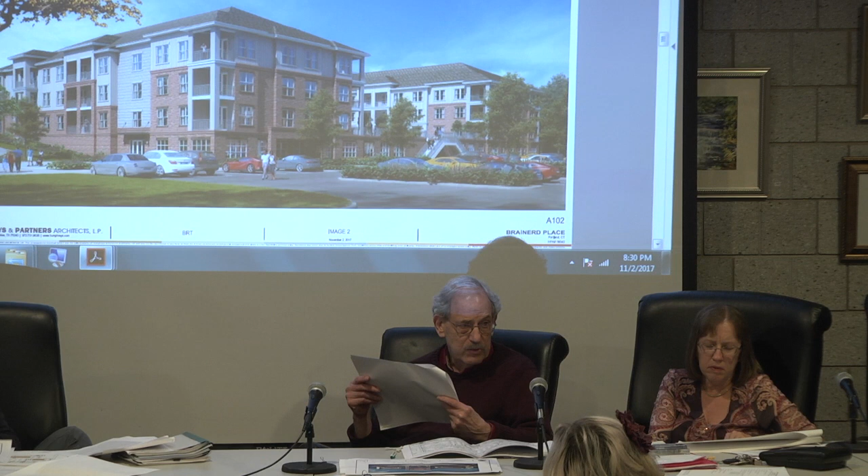Dan, you want to answer that? Yes, basically as I recall, the regs would not exceed 30% on the 2s. Okay, so it's a mix of studios and 1s that are in that 70% range, and then the 2 bedrooms are... I'm looking at the tabulation, it says 101 apartments, but of those 101 apartments, 29 of them are 2 bedrooms. The remainder are 1 bedroom. Right, okay, yep, you're reading it properly.

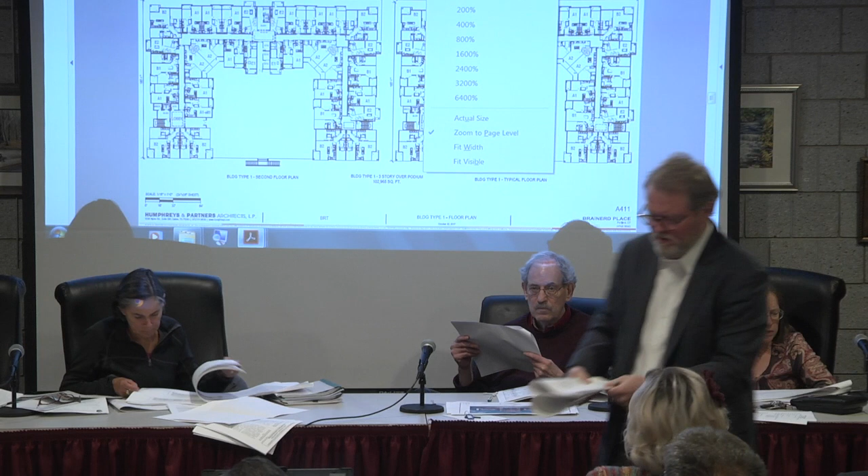It would be... here, do you want this, Dan? Yeah, it's like a 70. Yeah, there you see it on the screen. So you have that for each building. Well, I know, I'm looking in terms of numbers though, because that's why I asked if it's building E or building F, because you have an additional story on building F.

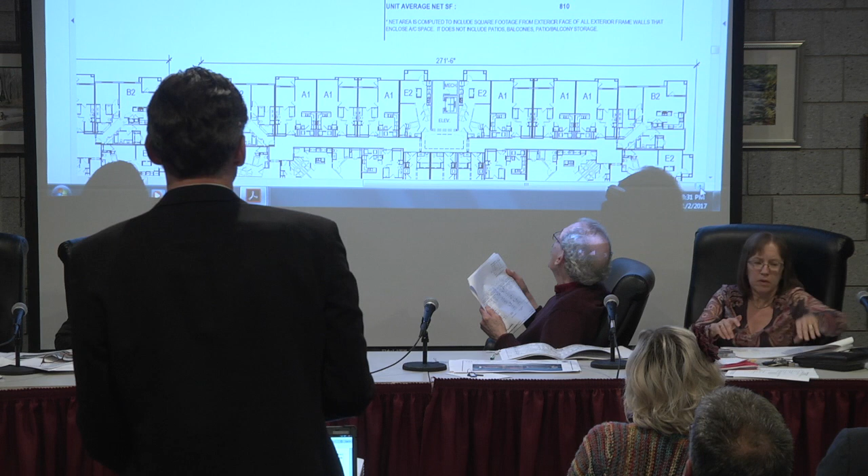Would you like to go to the tabulation for the 4-story? I would.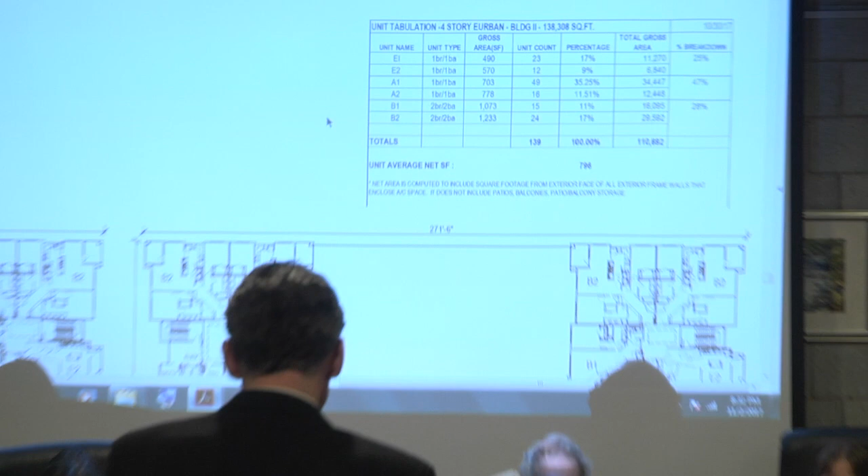Okay, so there are more, yeah, the percentage is about the same, so there are 39 2-bedroom apartments. And the breakdown, percentage breakdown in the right column is the... all right, so what's 39 and 29?

Okay, but yeah, I mean, they were given the directive, that discussion we had when we were actually talking about the regulation changes back. I know, okay. I'll touch on that, sure.

But I just wanted to be clear, when you said it's 3 stories and 4 stories, the building heights are the same because you're gaining more on the bottom. Yeah, and that story count is the residential floors where the apartments are, so it's kind of the same. It's like a sloping grade.

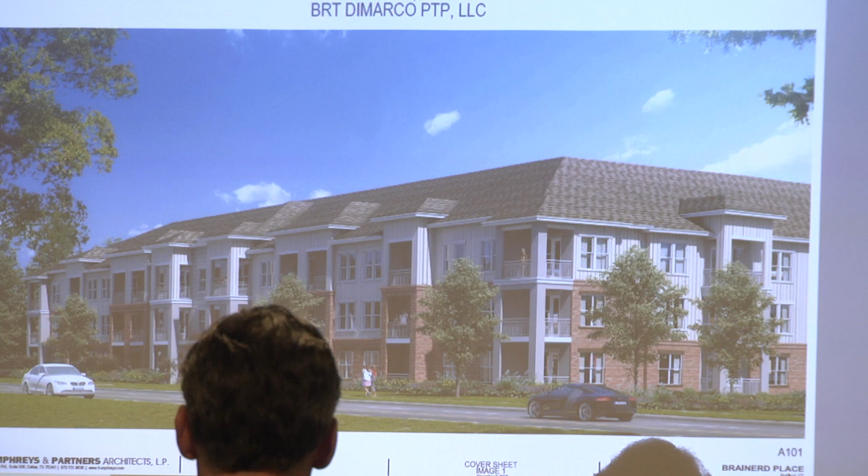What sets the building roof height on Marlborough Street, which Dan is about to pull up for us, is 3 stories. So that building elevation, if you drew a level line to the back of the site, that roof doesn't get any higher. It stays the same. What enables us to do that effectively is that the grade falls away so far to the back of the site, without impacting what's the perceivable building scale from the road.

The other thing to consider is that the site also falls for building A, so that building is about 10 feet lower than Brainerd, you think, Steve? About 14 feet lower than Brainerd. So in scale, I think Brainerd's 40 feet high, give or take.

And the front of A is in the 40s too. So the building from the road, Marlborough Street, nothing's going to look higher than 3 stories high, because the A building drops 14 feet, and the building's probably 40 some odd feet. So it's probably lower - the midpoint of the roof is lower than the Brainerd house, which is kind of interesting.

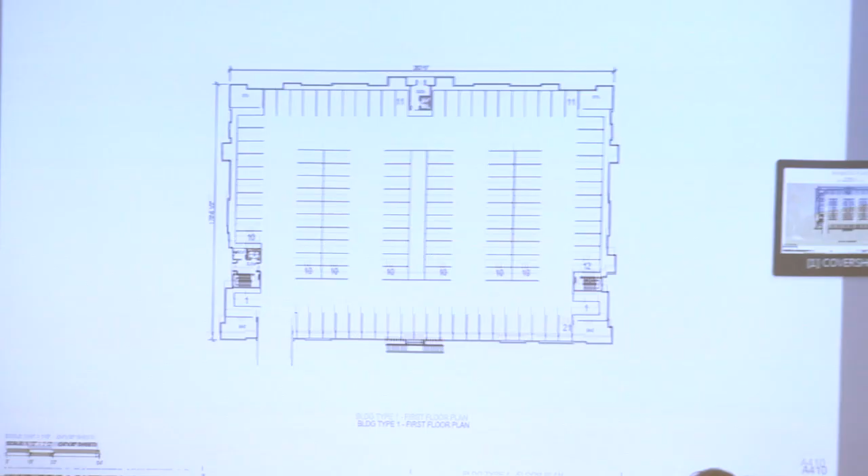The last building I'd like to throw out there, our favorite one, is our CVS building on the corner, which is a prominent location, and we all love CVS. I buy everything there, including stocking stuffers and half my Christmas presents, but on Christmas Eve.

But they're a brand, and they have things they need to incorporate into their buildings, and we are optimistic we'll be able to at least incorporate the palette that we feel is more sensitive to Portland and the campus we've tried to create, and whether we get a chance to change any of the building mass, we'd be happy to talk to them about it. But we will be revisiting that once Dan has secured them as a tenant.

When you say building, you're just talking about the size of it? The size is pretty much the same. We'd like to articulate something with it, change the materials if we can, maybe incorporate a piece of a gable that reflects off the retail commercial buildings so those buildings relate in some way, or maybe bring our vertical siding back onto it. They're so big, they typically dictate what they're going to build.

Right, so with that, I'll thank you. Good job.

So, are we done with the slides? I am making a quick reference and then we can cover it. That's what I'm heading for. Yeah, no, definitely. And the pointer is activated, not just the... there we go, okay. All right, so. What's that? This one? No, this works.

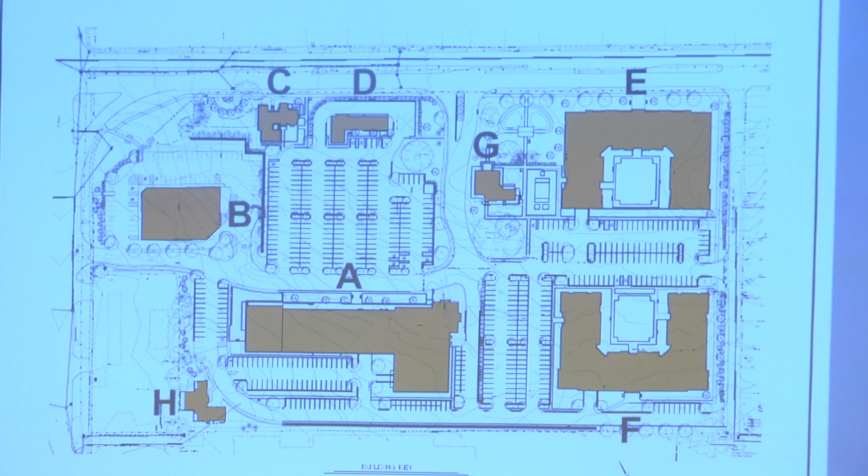So then you get into the process side of it. We have CVS that we're talking to, and we're trying to put a deal together, and we will absolutely, because it's good development, push to have as many features and their prototypes conform to the vision for the rest of the site. And when you look at the actual design of A and D, one of the reasons we put so much time and effort into getting the table set right was to have a very attractive, appropriate building, and then start the conversations with prospective tenants.

And that will bring us back to showing you what we've got going on the A building and D. This is something we're looking to get out of the gates. You can't figure it all out precisely before you start a job of this scale, but we can get all the guiding principles together. We can engineer it so that this thing can be filled in with economically viable tenants, and I think this is going to be a beautiful project.

So I hope that our presentation wasn't too long. It at least probably reflects the number of people and the resources that go into creating something like this. But I think we'll open it up to questions if that's what you'd like to do next.

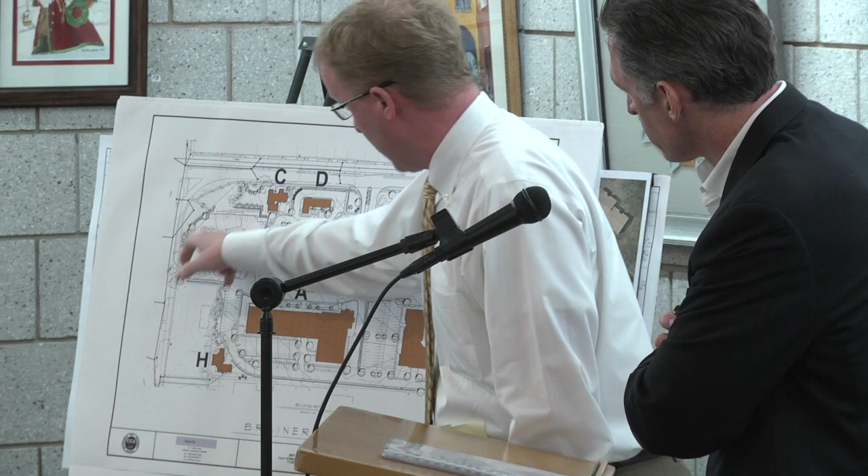That sounds like a design problem to me. Access - for the record, Steve Solomon from TCA. Access, if you're coming from this direction, you could make a right at this driveway and come around and enter the drive-through here. Okay, you're right. And if you're coming off of Main Street, you can come in around, or you could make a left and then a right into that drive-through. I'm thinking most people will come like this.

Okay, I'm looking at this, I don't see where the actual drive-through window is. Right there. Okay, okay.

Second question I have is around parking. I mentioned this during our informal conversation. You have 804 parking spaces. That strikes me, looking at this, as a lot, or maybe even too many.

We're interested in reducing the amount of impervious surfaces if we can. Sure, and we've tried to model out and accommodate, on a level I've never done before, tree saving, historic restoration, you name it. But there are rules for the net rentable areas and the parking ratios that we can't go below without running a risk at the end of a lease-up process where we're underparked and can't lease the remaining space because we don't have places for their employees.

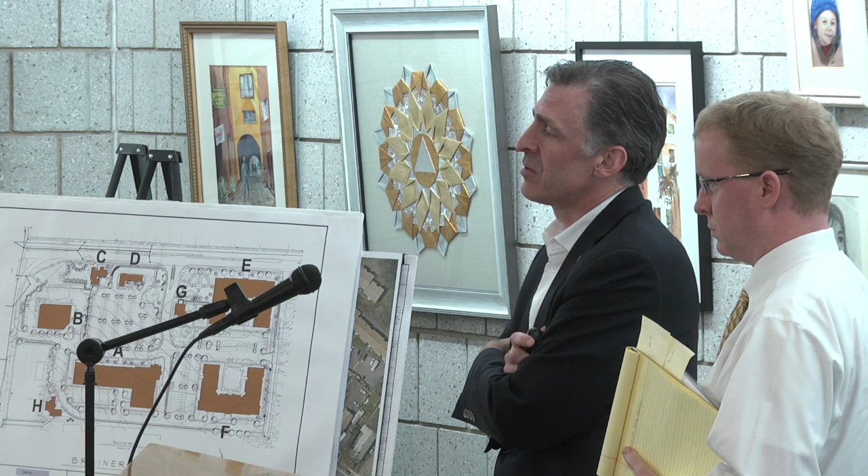So the two levels, and now three - the third level came about because we were accommodating requirements to keep the Hart Jarvis house on the historic registry. They wanted flat terrain all the way around the building, and so this 5,600 square foot section in the bottom of the A building materialized through accommodating historic preservation. I note this because each of these things, we've sort of been floating around, and at the end of the day, to have marketable space you've got to have sufficient parking.

You think by reducing the amount of parking, you'll be underparked, is that what you're saying? Absolutely, because when you look at the site plan, that A building is large and multi-leveled, with requirements on both the retail and upper office side that drive the parking calculation.

I'm looking at some of that parking for the A building, and some of it behind the building seems difficult - I'm not an expert, but difficult to get out of the parking places and into the store. So I'm trying to figure out, is that good business, or is it just to meet the parking numbers?

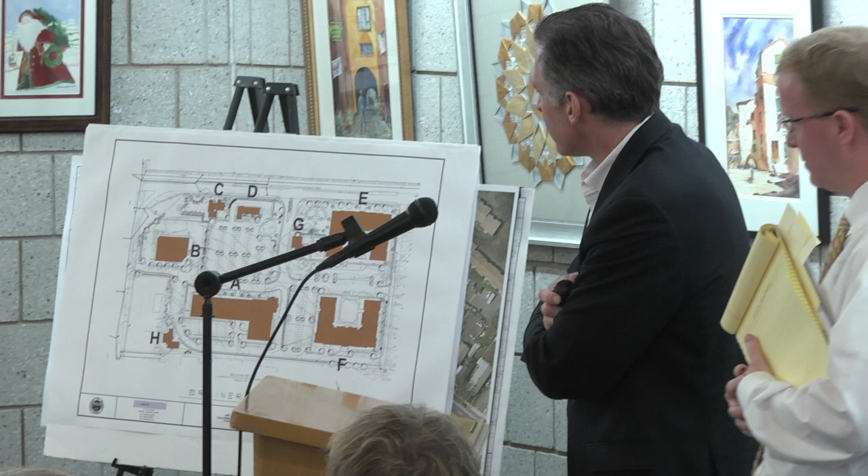So we fully appreciate the concept of having a balanced site. Our gesture in honoring that in the code and regulations is to say, let's create what people will experience as they come by the site. So this entire swath of E, G, D, C, B, H can be developed while this area can be done in a later phase. The perfect world is good leasing activity on A.

And the phasing plan just goes poof. In fact, you could find that you're on E, G, D, C, B, A, H, and this is the only thing going on in phase 2. But right now, we have to kind of say, let's get the dialogue started.

We can build this building on spec without any tenants, the coffee shop. You really would not take on a building of this size without pre-leasing activity. So it's hard to build it partially. Got it, okay.

I understand it from a development point of view, but we're real interested in having the residential and the commercial properties develop at about the same pace. Understood. And 40/20 doesn't sound like the same pace. But...

Other questions or comments, members of the commission? Yeah, I have another question. Sure, go ahead. It's about the pool. Is that something you found with this type of development is desired for tenants? Because I was thinking that could also be considered additional green space if there was no pool.

It's a very desirable amenity that's key to the marketing of this type of complex. Other questions or comments? Members of the commission?

Okay, my last one is, as I've said brownstone to you several times, and you said, well, we're gonna put it in lintels, and that's about it. No, the barn, half the barn. Half the barn looks like, to me, like this piece out here in the elevations. Yeah, that's full on brownstone. Do you have the colorized version of that? Yeah, I do. And it looks blue to me, blue and gray.

There it is, this whole back section. The whole back, oh okay, that goes around and wraps. Okay. No, I got it, I didn't see it. I saw it was in the shade. Yeah, yeah, no, I know. Yeah, it's kind of dark. Where it's situated, it'll be very prominent.

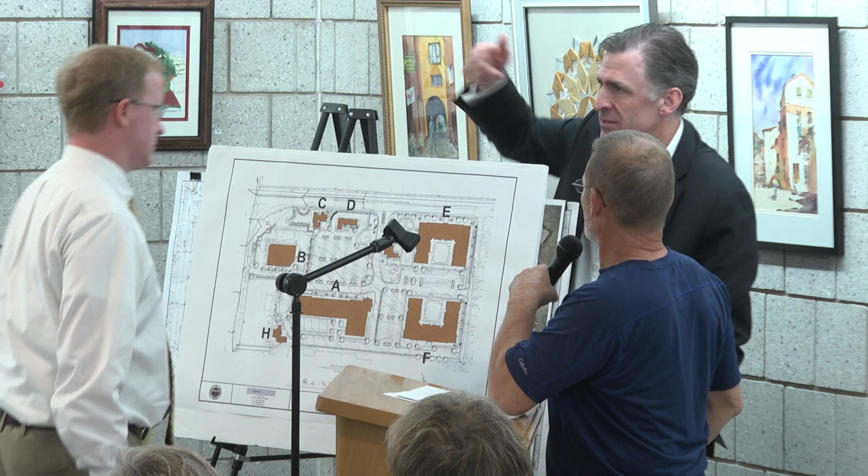There are rules on average grades around the building. Steve can highlight them - Steve Sullivan from CCA. Might be a technical answer that doesn't address what you care about. The 14-foot reference you mentioned was from Paul Harris, the architect, who asked me the elevation difference between Brainerd House and Building A.

Okay, so this is actually the biggest building. I mean, this has the bigger footprint, but this is the biggest building. As far as tallest, correct? Yes, tallest building.

Okay, I guess you answered my questions. I just think that the 2 buildings are huge. You're gonna see them from the other side of the bridge. You're gonna see them when you're traveling down 66. You're gonna see them, they're gonna stick out. They're gonna be the Twin Towers of Portland. I'm not sure that this quaint little town is ready for such a big facade right there when you come into town. That's my concern.

Thank you. Who else would like to talk? Yes ma'am, go ahead. My name is Hedi Zienowicz. I live on Joe's Pond Road. Can you spell that for me? H-E-D-I-Z-I-E-N-O-W-I-C-Z.

My question is: any reference in any way going to be made - you guys, could you speak into the mic, sorry - any reference in any way will be made in this property to Elmcrest's history there?